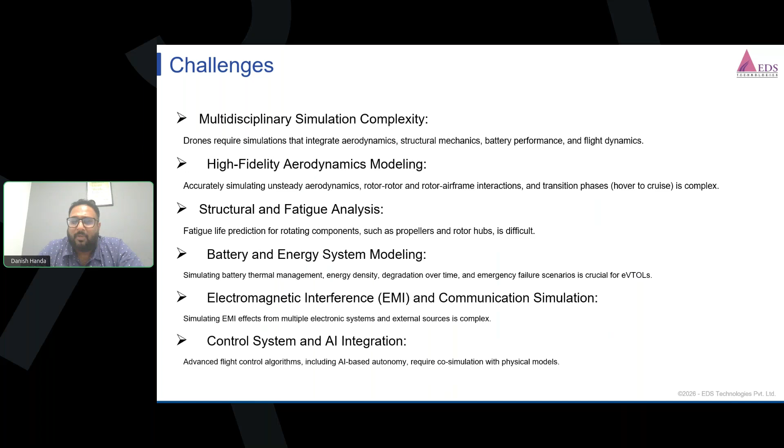Battery—nowadays we are working on battery systems, eVTOLs, etc. So definitely battery: understanding how different temperatures can have an effect on these batteries, how containment and storage effects are there. Then of course electromagnetic interference, because there are a lot of communication systems present inside the aircrafts, rocket systems, or eVTOLs, to understand the scenarios. And then control systems and AI integration, where we are working on advanced flight control algorithms, AI-based autonomy, etc.

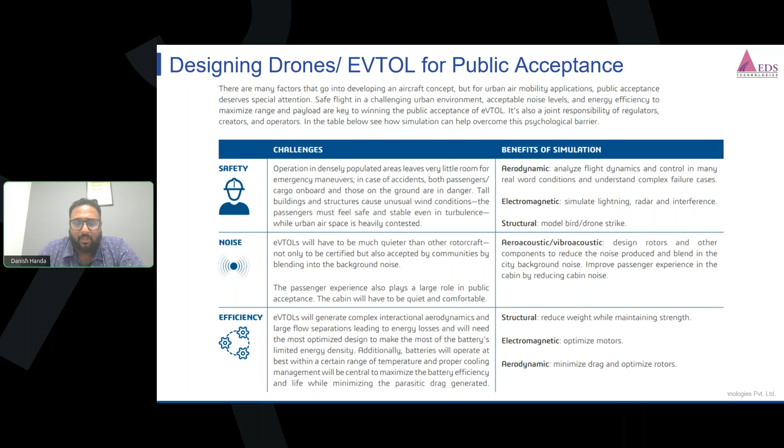So we have different solutions for that. For example, if I talk about aeroacoustics, or flow simulations, we have a product known as PowerFLOW. It's basically a solution that solves challenges with respect to eVTOL air taxis and flow simulations.

Then we have another solution known as CST Studio that works on both high and low intensity radio frequencies, to understand the entire electronic systems. Then of course many of us know about SIMULIA Abaqus, which works on structural simulations including explicit analysis, implicit analysis, as well as co-simulations.

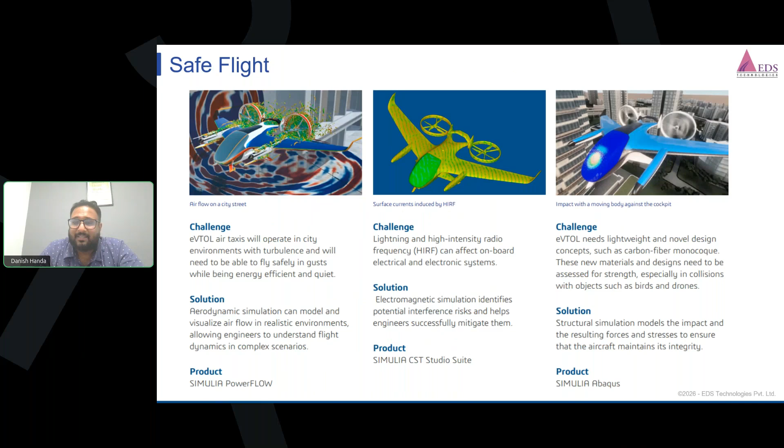We also have solutions for battery packs. We have a dedicated solution where you can model from cell level to package level of batteries, where you can understand what is happening, even the chemistry part of it. So we have a solution known as BIOVIA for that, and 1D simulations known as Dymola. All these simulations are integrated.

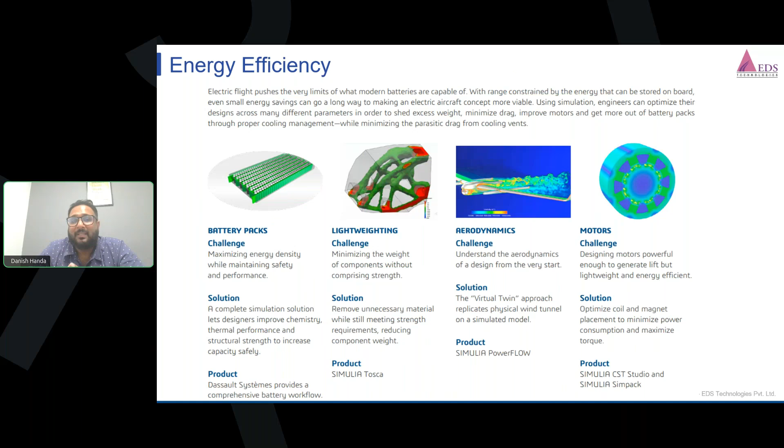And then of course we are more concerned about lightweighting in aerospace and defense with higher strength. So we have a tool known as Tosca, which can do topological optimizations, topographical optimizations, shape and size optimizations. And again, for aerodynamic challenges, as I told, we have PowerFLOW. And for motors, we also have solutions known as CST Studio, Simpack, as well as Manatee, where you can design, develop, and understand the electromagnetic effects of motors.

So moving towards the first challenge, that is our aerospace composite challenge, because now the industry has already revolutionized towards composites. We are overtaking conventional metal towards composites now. So it's very basic to understand how composites work, how we can design, simulate, and manufacture them.

So basically we have an end-to-end solution which can help you in designing, simulating, as well as manufacturing these composites, because composites are very unlike metals, right? They are totally anisotropic, non-homogeneous in nature, and they have layup effects. So you have to tell your manufacturer which layup I want to do, what kind of layup I want.

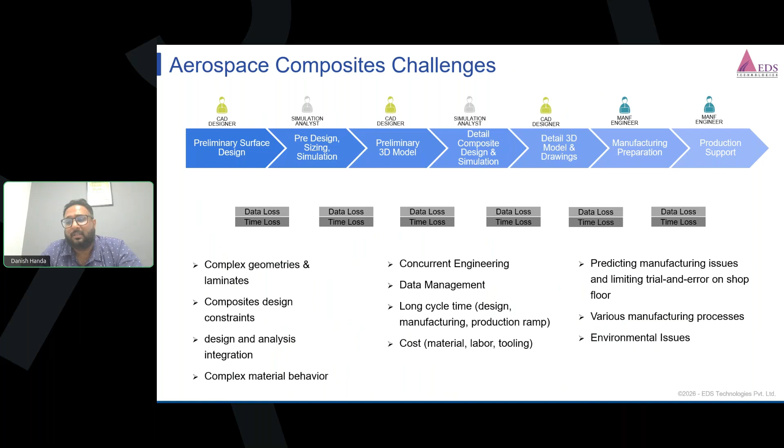So as a company, we offer a solution where you can have complete designing of your composites, whether it's a complex composite structure where you can use your own layups, create your layup sectioning, design the layups, and within seconds, this entire layup section can act as a preprocessor to your simulation tool. That is what we know as Abaqus.

And then you can also do some parametric studies, so that you are not manually changing any layups. You are directly giving the command to our parametric optimization tool that I want to use this thickness or these layup changes. So all these things can be directly transformed, and you can do n number of iterations within few minutes of time.

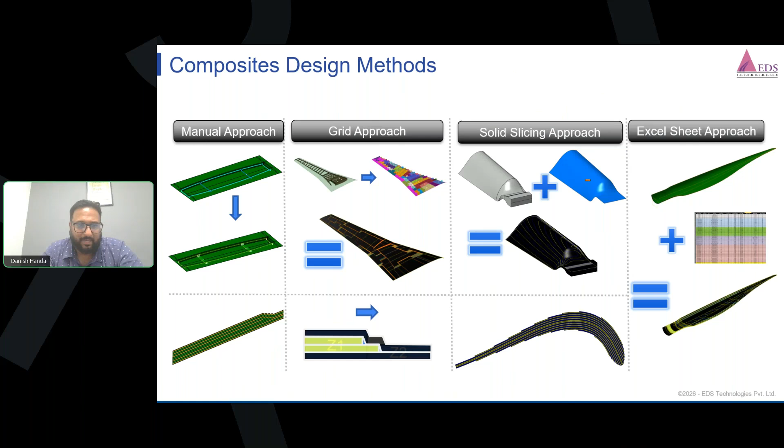So then moving towards simulation. Our simulation tool gives you the possibility for doing both 2D as well as 3D simulations. But another beauty is you can also do simulation of composites in both ways, that is shell as well as solid. In many software, they use surface modeling and then transform into it.

But here we can do both shell as well as solid modeling of composites, and you can get the ply by ply information also. So if I want to understand that I am having 10 plies in a particular composite, what is happening in the third ply, fourth ply, you can do all that.

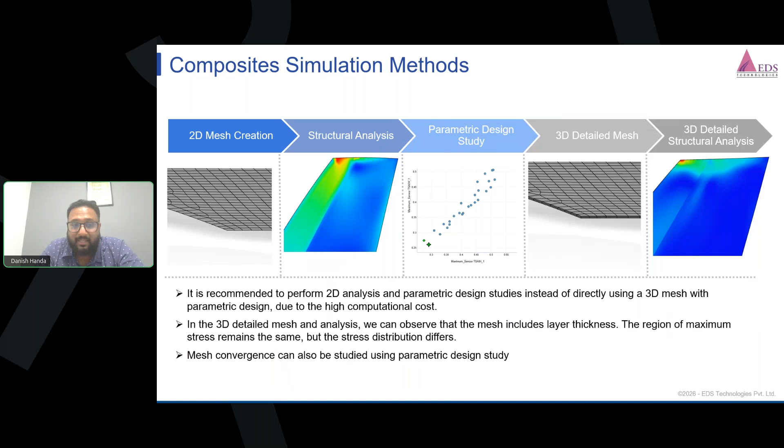Plus, we also have generalized theories. For example, von Mises stresses and all don't work for your composites. So here we have Tsai-Hill criteria, Tsai-Wu criteria, which give you the actual parameters to understand the failure of the composites. So here there are two different examples.

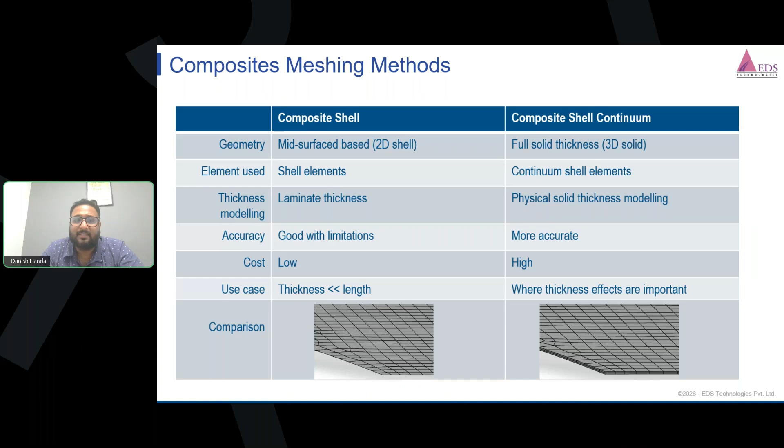For example, if it is a 2D shell or a 3D solid, this is the way how we can basically model our composites. Shell elements are there, continuum shell elements are there. Then we can give the solid thicknesses. So all these scenarios can be very well integrated with respect to our tool.

Different meshing methods are also there for composite structures. One is with respect to shell, another is with respect to continuum shell or solid. So all these things we can definitely do.

Then we can visualize the plies also. For example, you are giving an orientation because it has a very good impact on how the strength is basically for what loading condition you want, what kind of strength. So it helps you understand, and you can visualize your layups as well.

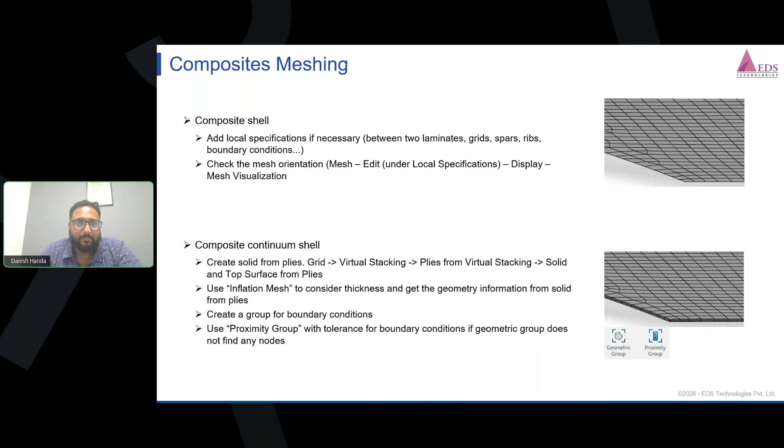And then after performing your simulations, you can definitely do the parametric study. As I told you, there might be chances your material may fail in the first chance, second chance, third chance. So what you do is normally you manually change the things and then you do the simulation, which takes a lot of time.

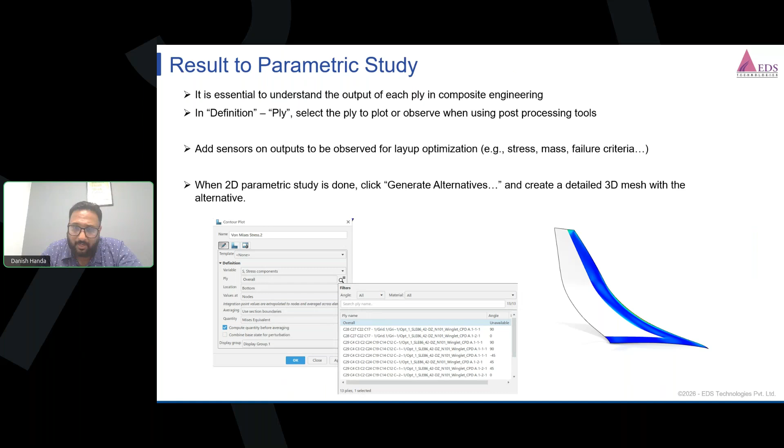So here we have a parametric tool where you can give the change in orientations manually, and it can perform the simulations in a nick of time. For example, I want 45 to change to 90, or 90 to change to minus 45, minus 45 to 30. So we'll give all the parameters to our parametric optimization tool, and based on that, it will give you the results for all these particular scenarios in a nick of time.

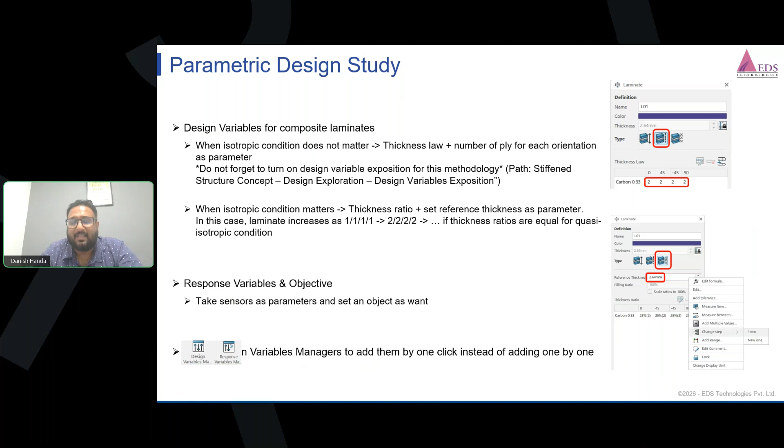And then you can do different iterations also based on the thicknesses, based on orientation effects. So all these things can be taken care of by the tool itself.

As I was telling you, it is not only designing and simulation of the composites, but also the manufacturing of composites. You need to make manufacturing drawings out of that. So basically simulation or designing we are doing to manufacture something, right? That is the reason we also have a tool for manufacturing preparation.

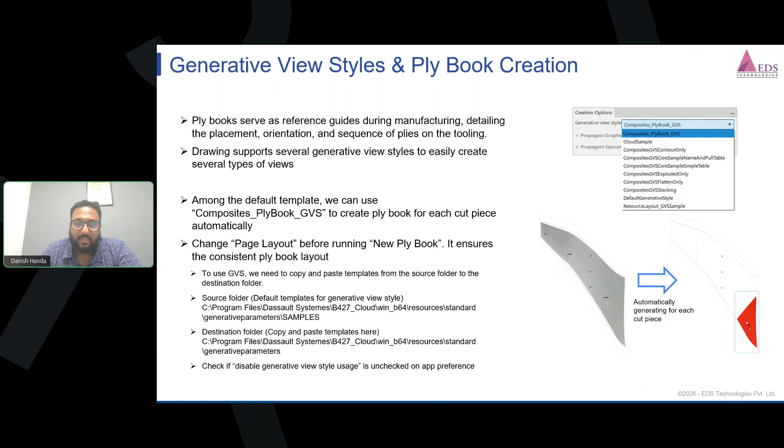So here what we can do is we can create layups as well as protruded views, or you can say exploded views for all these particular scenarios. And then you can generate your own designs based on the models you are having, and you can pass it on to your manufacturer. So manufacturing drawings, all 3D parameters, 2D parameters, the cut sections of each and every ply can be given to the manufacturer for that thing. So it's a very safe as well as good tool to use.

So this is the entire scenario for composite preparation. That is, you will start with the preliminary design, followed by composite simulation validation, and then a detailed composite ply design, and then the manufacturing part. So we covered each and every scenario in a single environment.

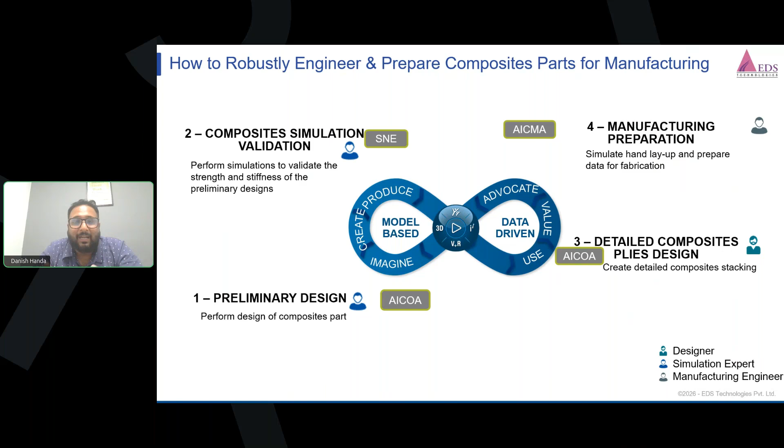As I was telling you, right now we are talking about different tools, but now we have a unified tool known as the 3D Experience platform. So you might be seeing 3D VR, all has been written. So now it's not only Abaqus or CATIA. Basically, we have a set of tools that can do seamless simulation in a single scenario. So I'll showcase you also a demonstration video of how it basically happens.

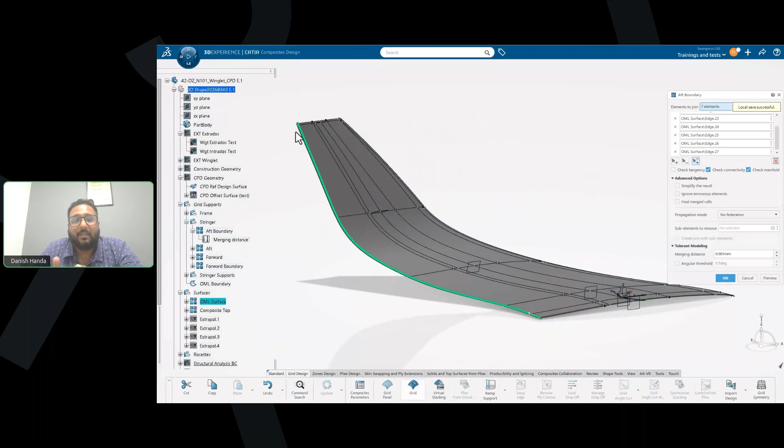So this is a particular scenario where you are using a 3D Experience platform. You can see the GUI also. Here, if you can see on the top left hand corner, it is 3D Experience CATIA. So this is CATIA, but the interface is changed. So here we are using a CATIA composite tool where you are doing all kinds of layup, sectioning, simulations, and everything in a particular platform.

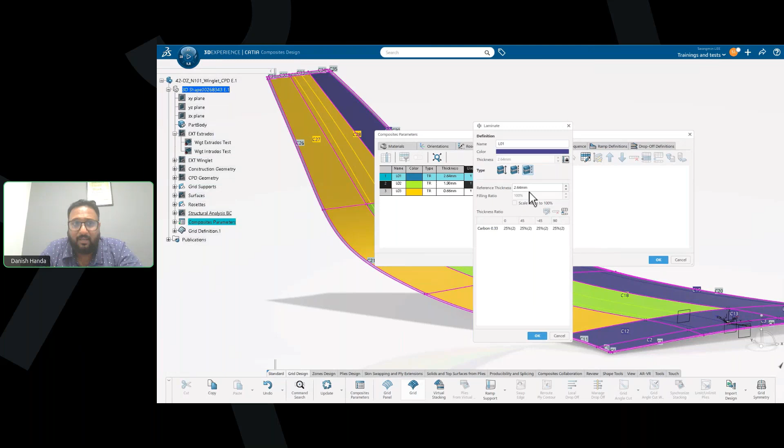You can see carbon fibers, cured thickness, uncured thickness, ply generations. Everything is done in this particular window. And once this pre-processing part of ply generation and everything is done, then within single clicks or a few clicks, you can directly go to the simulation tool. So you can see here, now the scenario has completely changed. Now you are in CATIA composites design, and in a click you have reached SIMULIA.

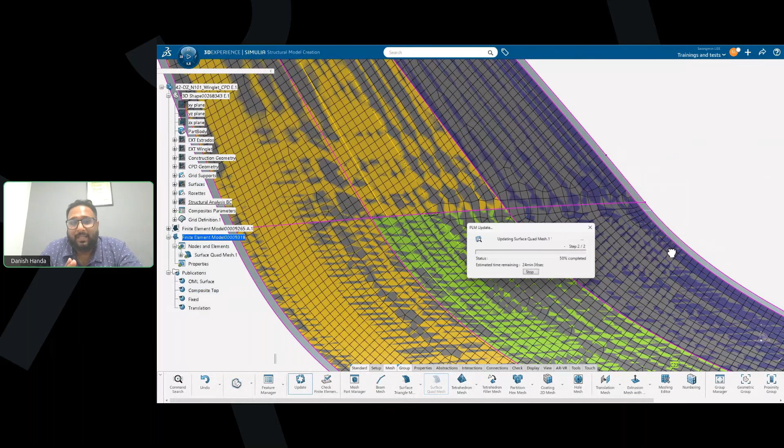SIMULIA is nothing but the backend which works on Abaqus only, but your data is saved, it is not lost. For example, when you are making a complex geometry, what happens when you upload the data in the form of a step file, CAD file, SLDT files? So when it goes to an FEA solver, what does it do? It may repair, it may have some gaps. You have to repair all these gaps.

Many a time it happens, but in our 3D experience platform, you are using the same GUI for CATIA and for Simulia. The only difference is within clicks you have to transform that geometry, so there is no data loss or anything that happens here.

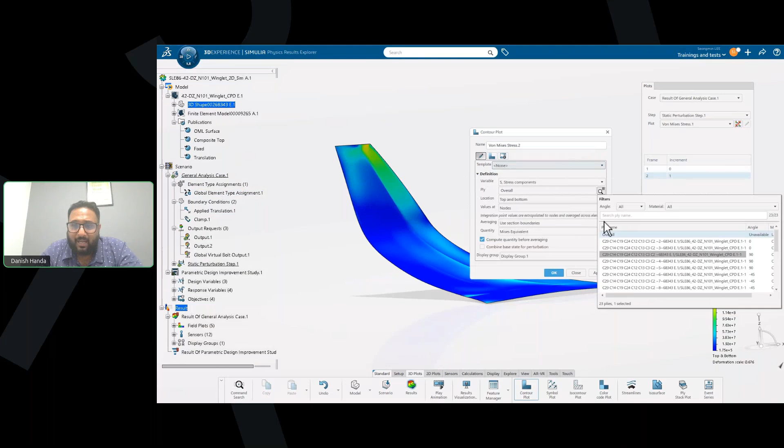Right now you can see the simulation has been completed, and the scenario is such that you can understand what is happening with it. You can see on the left hand side Simulia parametric design study.

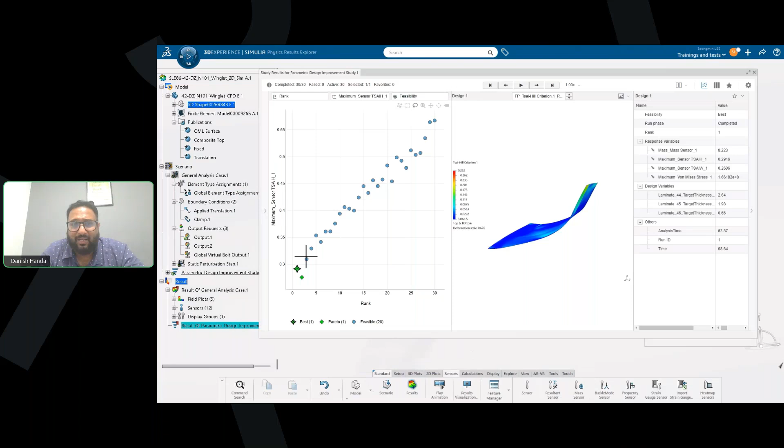After the simulation has been completed, we will be doing a parametric study using our own parameters—for example, this much stress, this much thickness, or this much ply orientation. I can do all these kinds of things, and within clicks I will get all the scenarios, for example maximum stresses or whatever inputs I have taken. I can simulate it all and understand what happens in each scenario. So this is how entire studies can be done.

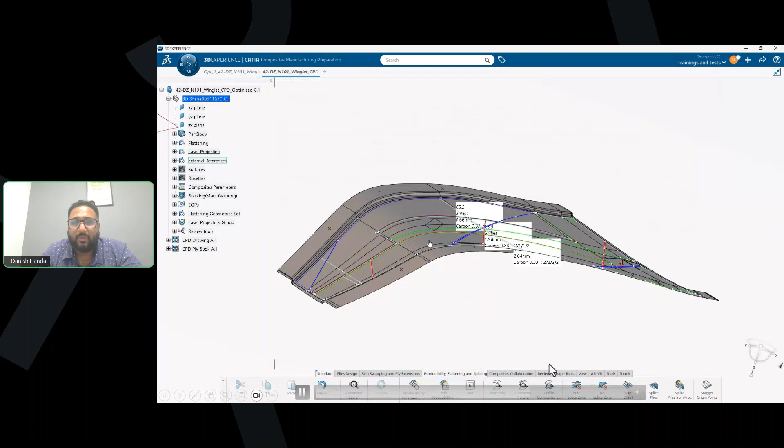Further, when we move towards the manufacturing part, you go to CATIA composite manufacturing preparation. Here you can create your own manufacturing drawings which can be transformed for your manufacturer. On the left hand side, the red color things are nothing but ply sections—cut ply sections basically. You will be able to transform each and everything into a manufacturing drawing and pass it on to your manufacturer. So this is an entire scenario of composites.

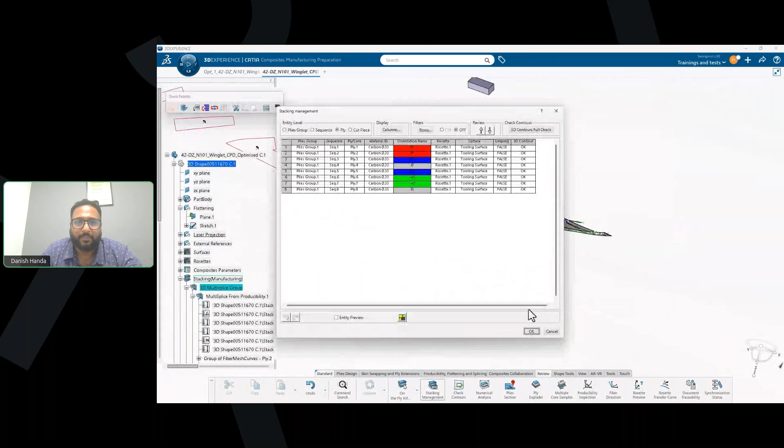Now we have done the structure. Definitely metals and other materials are also there in structures, and you can easily do that. A lot of explicit analysis, crack propagation analysis, you can do.

So you can create your own wind tunnels to understand what is happening with drones, and create your own fluid scenarios for different case studies.

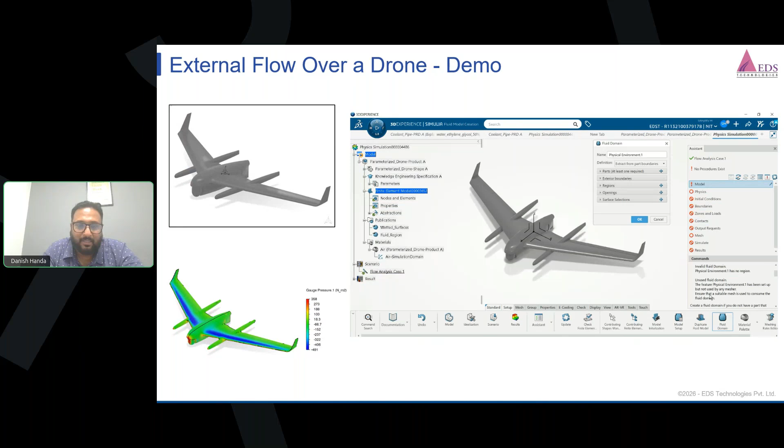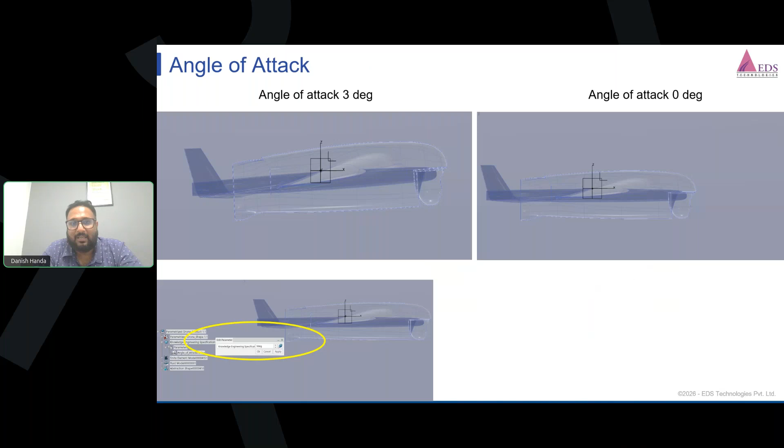One more thing—for example, if I want to understand what is happening with different angle of attack scenarios, we have taken one case study where one angle of attack is 0 and another is 3, and looked at how the fluid scenario creation happens, what the gauge pressure is in two different cases. So you are performing two different solutions, but you can compare all these solutions in a single window as well.

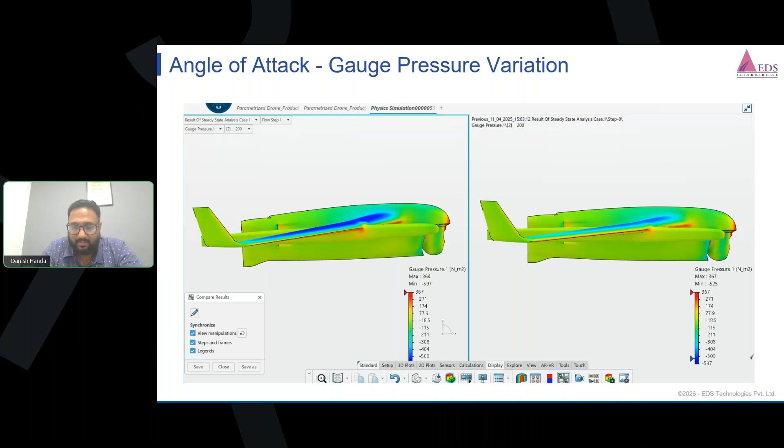So for example, for 0 degrees, what is the scenario? For 3 degrees angle of attack, what is the scenario? Similarly, you can have all your contour plots based on the inputs or outputs you want.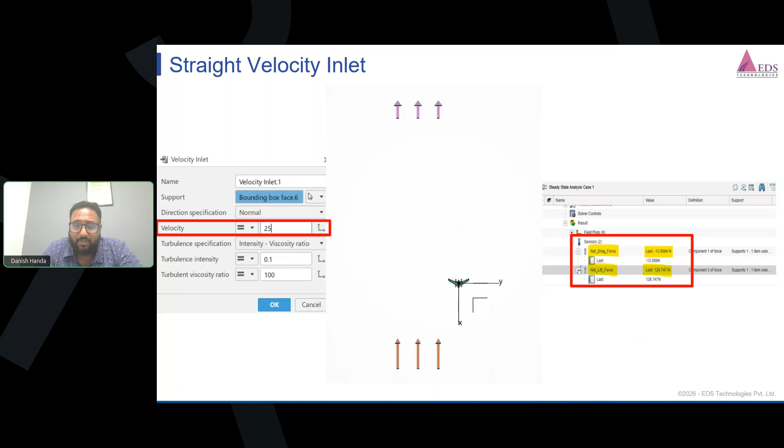There is also a linear velocity or straight velocity input at the inlet that you can give, and then study the fluid, but you can also provide the conditions of yaw and rolling movements. You can give the velocity direction in X, Y, Z directions so that you can understand how the yawing and rolling conditions can be simulated.

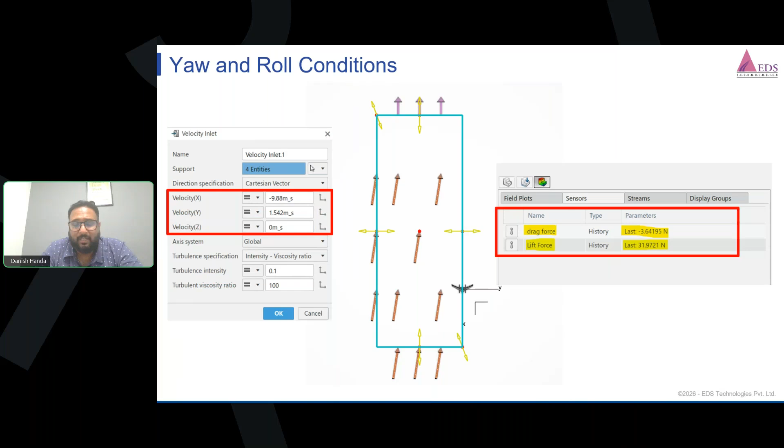You can also get outputs in terms of drag force and lift force. So for example, if I want to understand the CD, CL, CM of a particular thing, or the lift to drag ratio of a particular environment, I can do that.

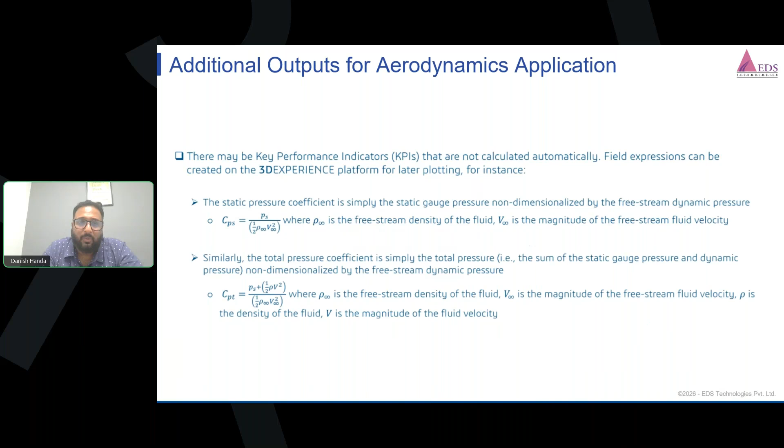Some of the outputs may not be available in the solution directly. So what you can do is use your own formulas—we have a tool where you can put your own formulas, and based on these formulas you can get the contour plots. For example, if I want a particular field expression like CL, I will put a CL formula, that is the coefficient of lift formula, and based on that I can get the output in terms of coefficient of lift.

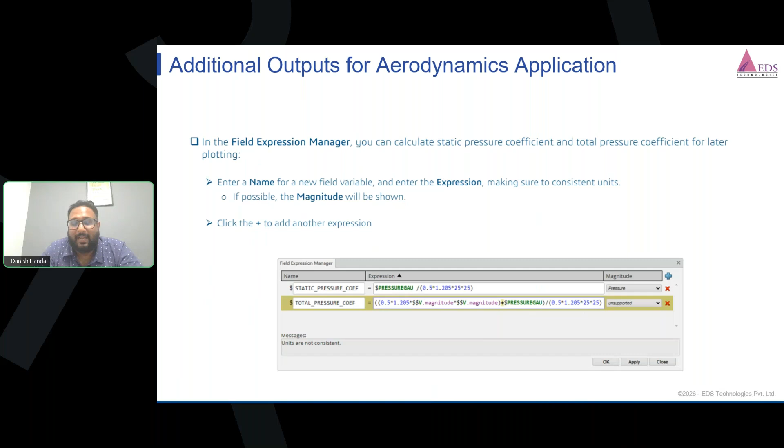So these scenarios are also covered in the simulations. Another important part is where you have radar systems, antennas, and PCB designing—these are all very complicated things we need to understand, and our platform can also do that. So what happens here is, firstly, we have started with designing something, and secondly, we have done simulation in a structural manner.

Third, we have done simulation in a CFD manner. Now, the fourth part is we are covering the electromagnetic parts, radar parts of this particular scenario.

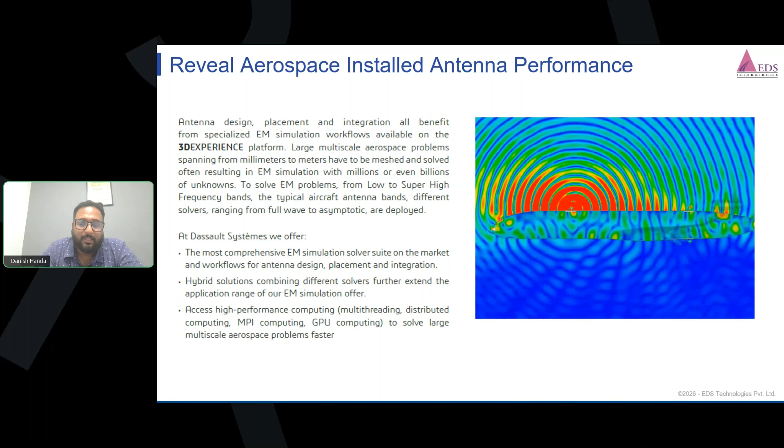So first case study is how we are simulating the particular scenario. For example, you have designed the antenna, prepared the 3D model of the entire aircraft, where you are placing the antennas, how the RF component works, how the design verification is taking place. So the entire thing you can do in a single software.

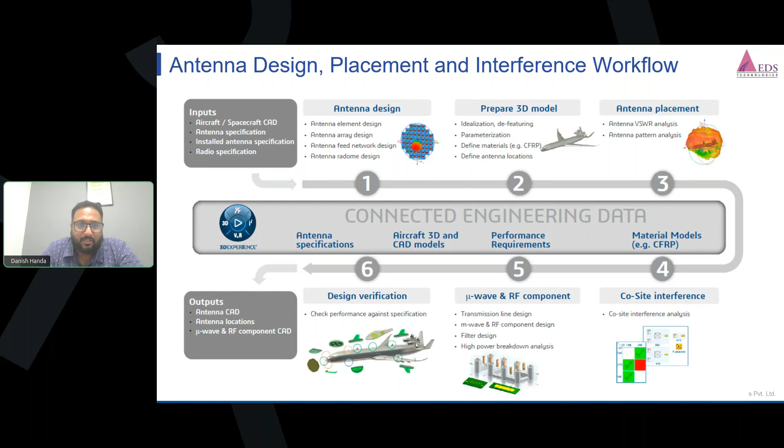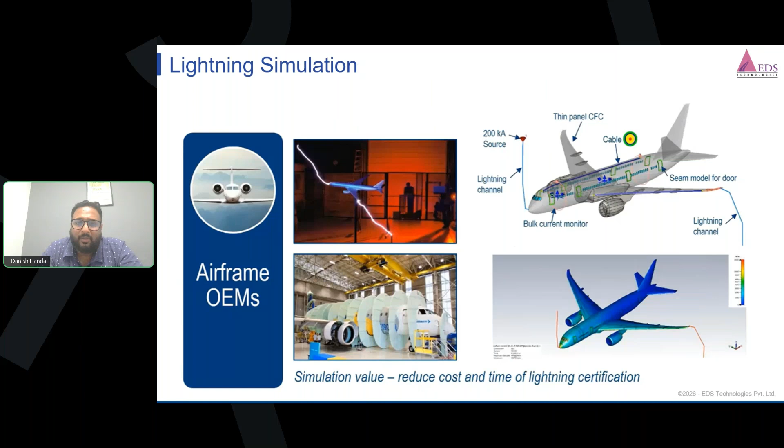One of the case studies is lightning simulation. You can see experimental things are also going on, and parallelly, the simulation work is also going on. So you can do the lightning simulation in our simulation tool, where you can have your own cables, your own sources, lightning channel, and all these things, and get the output in terms of currents versus time, etc.

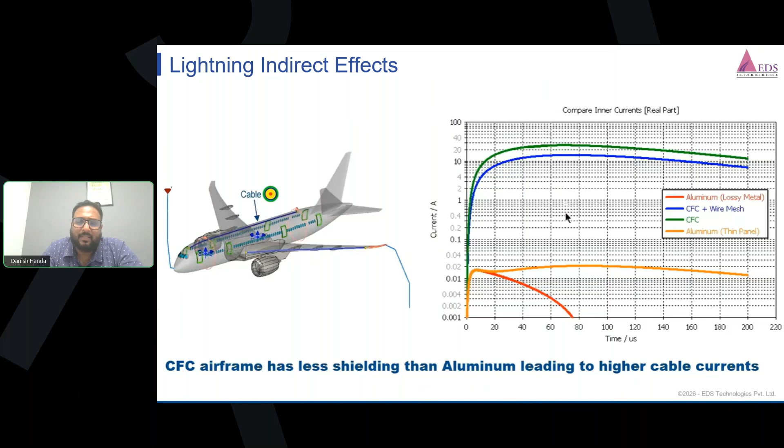Similarly, these case studies are for different materials - you can see aluminium, carbon fiber composites, again aluminium. So different scenarios have been developed here.

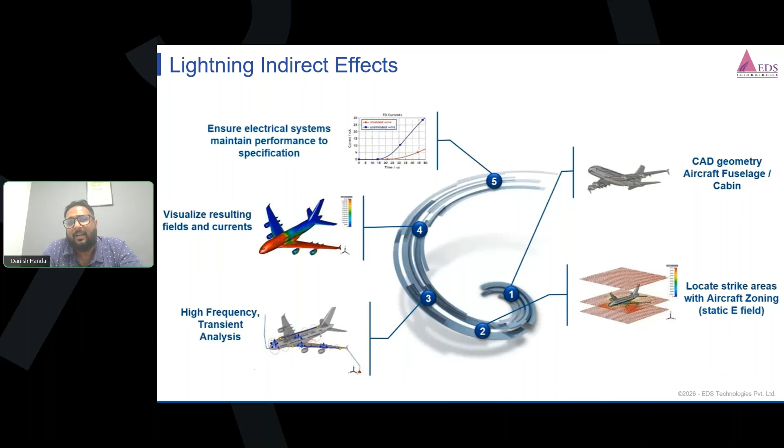Another aspect is lightning indirect effects, where you can have your locate strike areas, decide high frequency transient analysis, then visualize the results. So it works on both high frequency analysis as well as low frequency analysis.

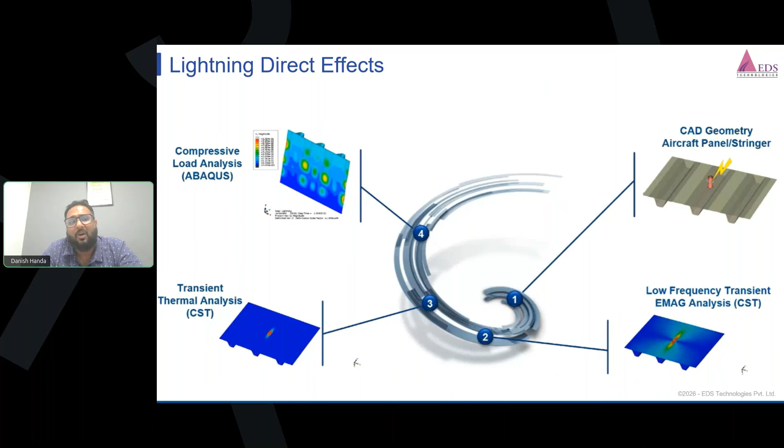And these are the direct effects in terms of EMAG application, where you have low frequency transient EMAG application with respect to aircraft panels, and you can also do transient thermal analysis. These results can directly go into a structural simulation for understanding better in terms of compressive load analysis or any kind of bending load analysis if you want to do.

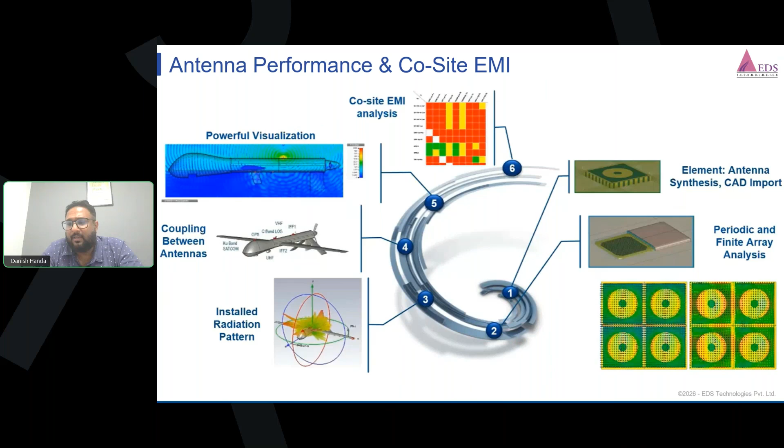Third thing is again antenna performance - how our antenna should be, what kind of rays are there, what kind of radiations can be done, how the coupling between antennas can happen. All this kind of visual understanding can definitely be done using this particular solution.

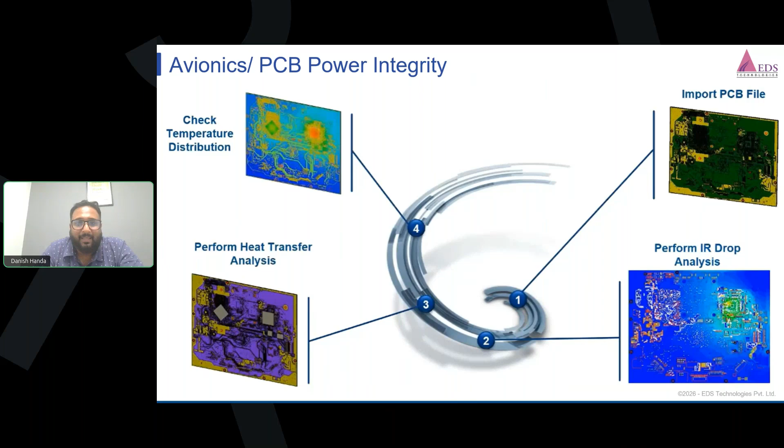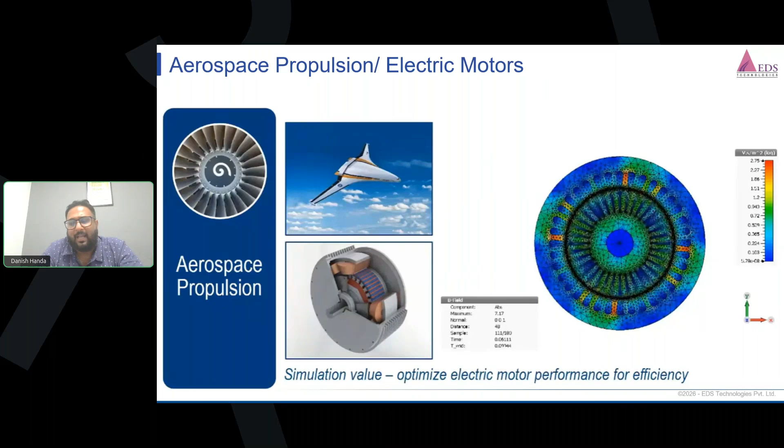So here what we are proposing is that it's a single GUI, a role-based system. Whichever role or situation you want - for example, a structural engineer wants a structural scenario, we can provide that. Then a CFD person wants a CFD scenario, we can provide that as well, plus the EMAG applications, the radar applications, etc. We also have one major tool where we work on multi-body dynamic simulations, both rigid as well as flexible.

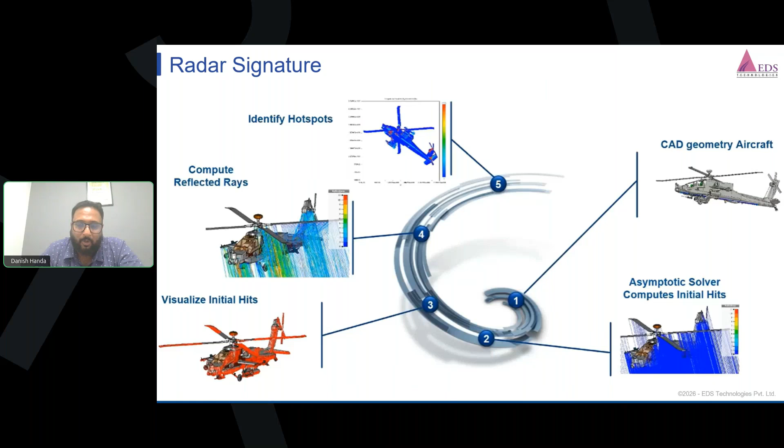Mr. Anand will be demonstrating how the multi-body dynamic simulations can help you out, and then followed by that we will be taking your questions. So over to you, Anand.

Thank you, Danish. I hope I'm audible. Yes, Anand, you're audible.

So this is the agenda for this Simpack session. We will discuss what is Simpack and its applications, then the benefits of SIMULIA MBS or Simpack solutions, and then some advanced vehicle dynamics MBS processes like handling, ride, drivability, durability, NVH, and real time.

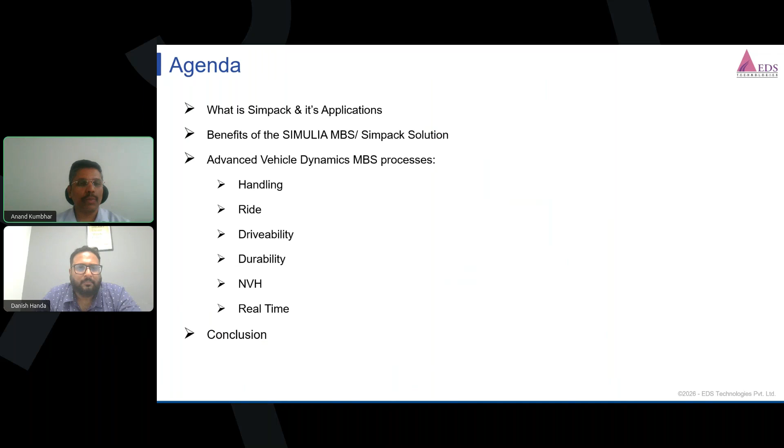So what is Simpack? Simpack is a multi-body simulation software used to analyze the dynamic behavior of mechanical systems that contain multiple moving bodies connected by joints, springs, dampers, and force elements. Simpack is used to predict and optimize motion and loading of any mechanical or mechatronic system, even up into the acoustic range.

Its applications - first is automotive, where we can go for handling scenario, ride and comfort scenario. Then next is engine application, a complex system that has almost 100 moving parts, and it includes flexible bodies also. So a lot of details are there.

Then the next application is railway vehicle. Simpack is very strong in railway vehicles, and it is the first application of Simpack. Here we can go for derailment analysis, comfort analysis, and we can calculate the critical speed of the railway vehicle. Then next is wind turbine, like offshore wind turbine, where we can generate the aerodynamic and hydrodynamic forces in Simpack and analyze it.

Next is a roller coaster, which is just a railway vehicle, meaning any type of railway vehicle, and we will check for the wheel to rail contact.

Then next is earthmoving machinery. It is important to bring in the overall hydraulics, so we can also bring the hydraulics into this.

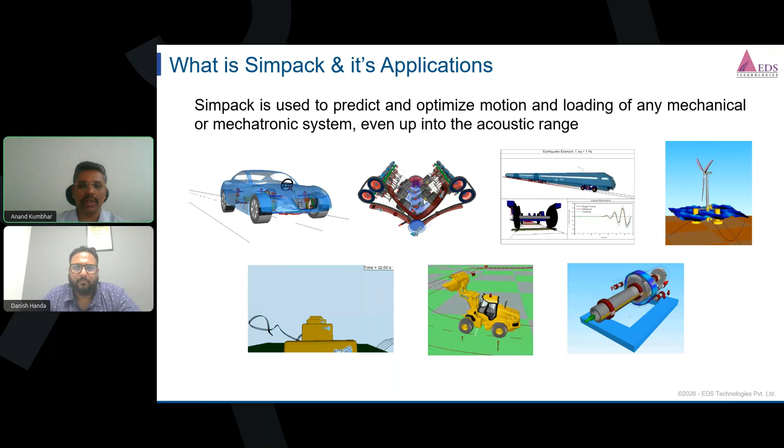Now we will discuss the benefits of SIMULIA Simpack: versatility and efficiency, solver speed, solver robustness, result accuracy, real-time capability, and process automation.

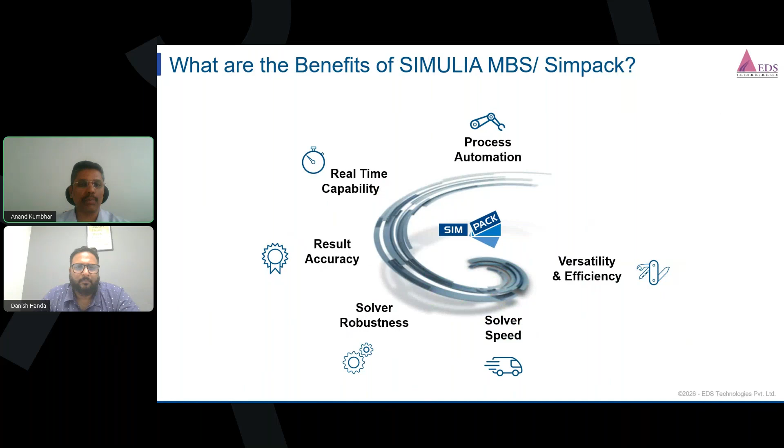The first benefit is versatility and efficiency. It's mainly easy and efficient model setup, simulation process standardization, and advanced MBS result assessments.

How is it achieved? We have Simpack Pre for the pre-processing, and for process standardization we have Simpack Wizard with standard templates, and we have Simpack Post.

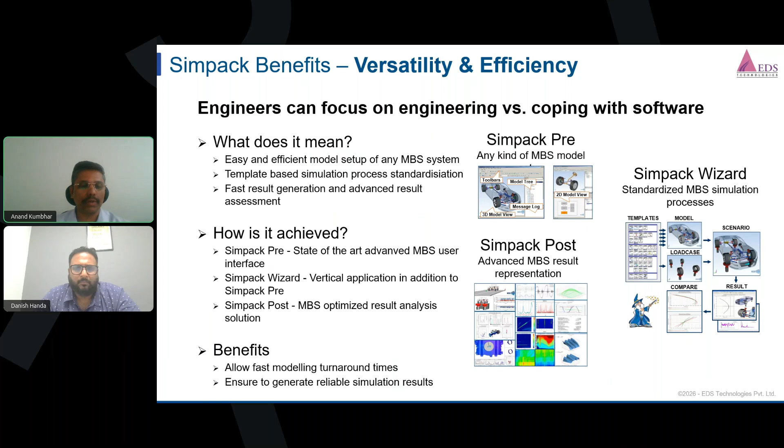Why is it important? Because it provides fast modeling turnaround times and reliable simulation results, and due to process standardization, it allows fast result and KPI assessment.

Next is solver robustness. What does it mean? It's mainly about challenging simulation scenarios which are running reliably.

For example, in this animation, it's a complete vehicle model running over a huge single bump, with lift off and touchdown effects, which is quite challenging numerically. This runs very robustly in Simpack, meaning there is no time consuming solver tuning necessary.

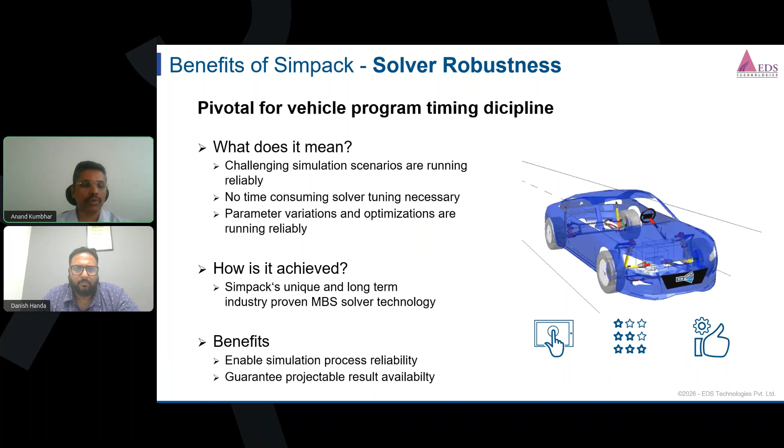This is important because it guarantees simulation process reliability and projectable results availability, which is essential for the according simulation processes.

Next is result accuracy. Simpack does not only deliver accurate results in low frequency areas, for instance handling dynamics applications, but also accurate results up to the acoustics of a gearbox, like gearbox noise or other acoustic effects.

This also means it is possible to set up models with an unreached level of model detail. For instance, here we can see complete car models, a complete truck model, and also a complete engine model containing many detailed components.

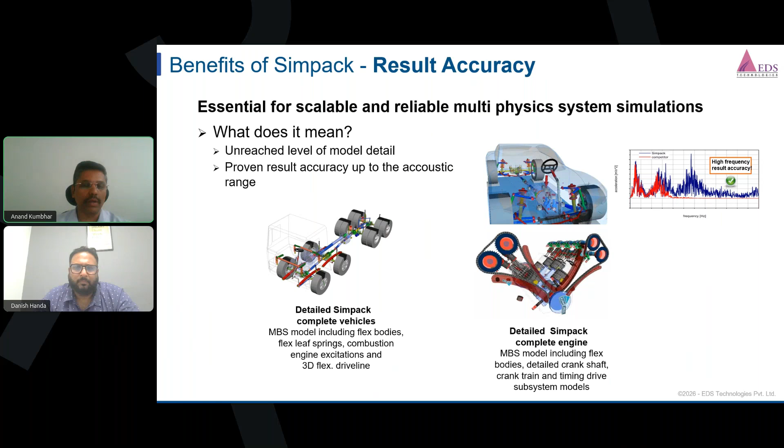Due to Simpack's solver capability, it's possible to get very precise and accurate results for those kinds of models. How is it achieved? There is an important technology called the Simpack flex body integration technology.

There are three types of flexible bodies we can import here. First, Simpack MBS integrated reduced linear flexible bodies, which is only a linear deformation. If you want that, you can go for this.

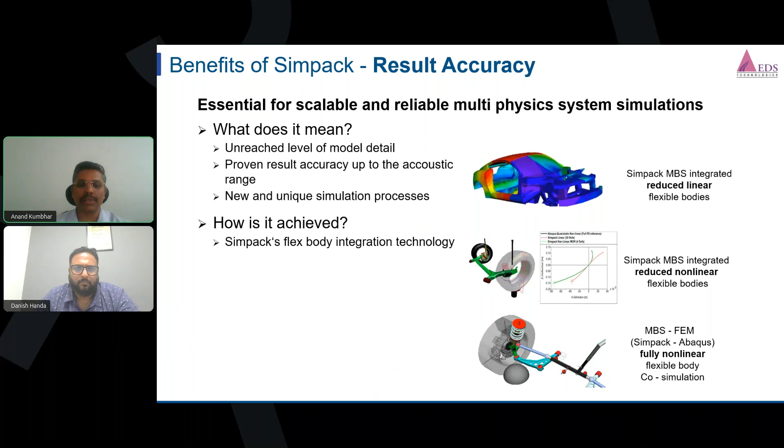If you want a non-linear deformation, you can go for the Simpack MBS integrated reduced non-linear flexible bodies. There is also co-simulation between MBS and FEM, like Simpack and Abaqus, meaning you can also include plasticity in this co-simulation.

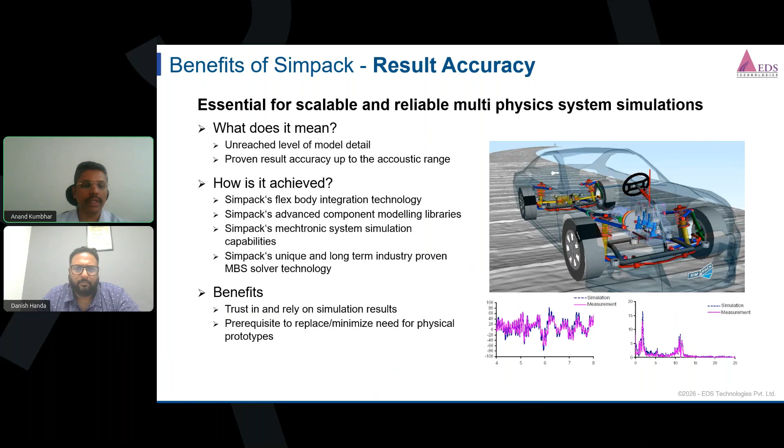Why is it important? Because it's in order to ensure trust in and rely on the simulation, which is a prerequisite to minimize the need for physical prototypes with accurate simulation results.

The next benefit is real-time capability. This means we can have an unreached level of model detail enabling new simulation processes, and due to having those detailed models also running in real time, we can now enable processes like real-time ride simulators.

As you can see in this animation, a real-time ride simulator is shown. One person is sitting inside the test rig, giving input to the model built in Simpack, which you can see here.

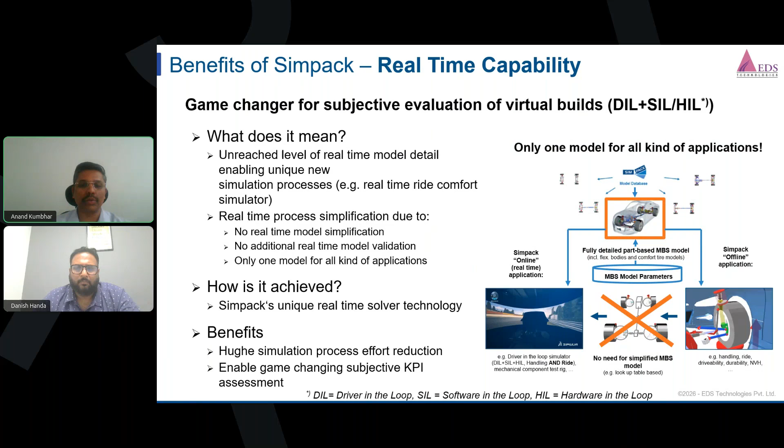With actual physical devices like steering, acceleration, or brake pedal, he is giving input to this car which is built into Simpack. That's what is called real time.

What does this mean in terms of process simplification? Being able to use the same model for offline and real-time application means there is no need for real-time model simplification; we can use the same model for real-time applications.

And last but not least, there is process automatization capability. This means Simpack provides coding tools and processes to do automatic execution of standard simulation processes and automatic assessment of the standard products KPI.

How is this achieved? We have Simpack wizard capability to facilitate the standardized processes. We have standard templates here we can see, and we can select these templates and build the model. Also we have standard load case templates, so we can select the load case. We have built the model and we can create the scenario. Then we can go for the results, run it and go for the post processing.

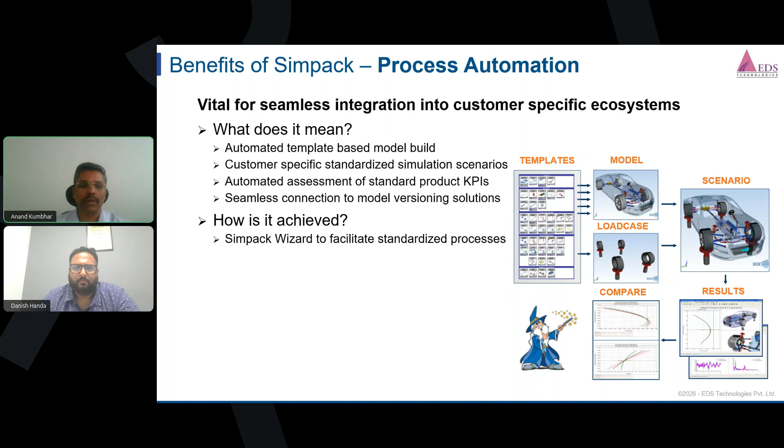It is based on the intelligent assembly of the model hierarchy levels. You can see here on the right side, the whole process is based on template based parameterized models, which can be grouped in models and sub models, and are assembled automatically.

Last but not least, Simpack provides a scripting capability for all kinds of Simpack functionalities. This starts with the model creation, goes through solving the models and doing parameter variations, up to the result of post processing.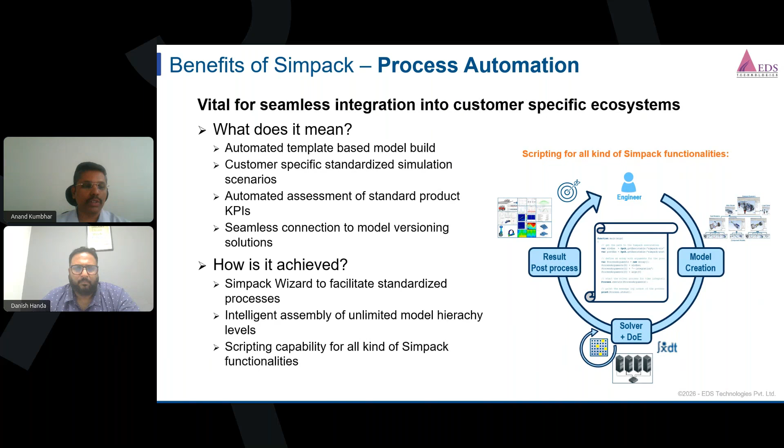Next, we will discuss the vehicle dynamics relevant components and systems. There are many relevant components and systems to be considered. This starts, for instance, with the combustion engine, and the gearbox block unit, which includes the clutch, flywheel, converter component. It includes the flexible gear drive and flexible drive lines, and of course flexible elastokinematic suspension. Then the steering system, and last but not least the flexible car body or subframes.

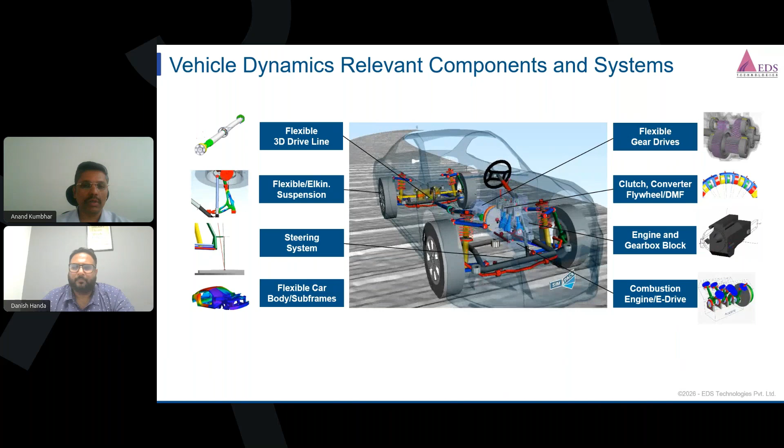Next, we will discuss the workflows in the vehicle dynamics application areas. First we will start with the handling. Handling means the assessment.

Handling means the assessment of the lateral vehicle dynamics and according KPIs. Typically a vehicle should be easy to drive and easy to control at a lateral dynamic stability limit, and it should also be fun to drive. For instance, dynamic steering response and steering feeling should be convenient.

In order to achieve this, it's a complete vehicle simulation in terms of open loop maneuvers like constant velocity cornering analysis scenario or fish hook, as well as closed loop maneuvers including according driver models to do simulation scenarios like a double lane change, constant radius cornering, or other simulations. Here we can see this automotive vehicle, a passenger car. It is applicable to passenger cars, trucks, buses, or any defense vehicles also. So we can go for that.

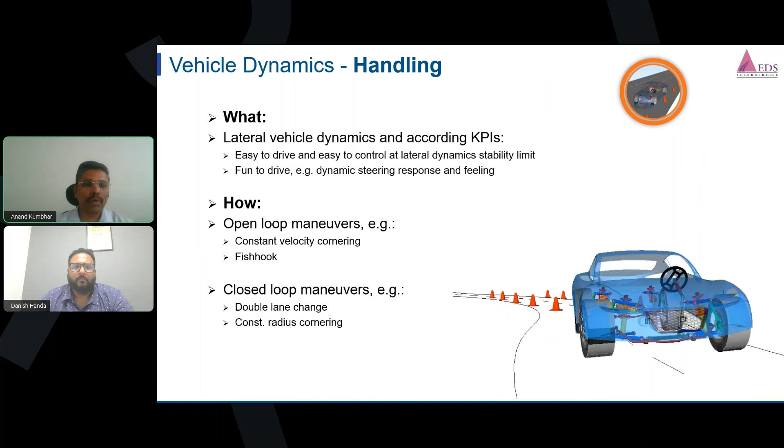Next workflow is the ride. What does it mean? It is related to the vehicle dynamics and according KPIs. The target is convenient vertical vehicle oscillation behavior and the related occupant driving comfort perception.

In order to achieve this, using virtual simulation scenarios, for instance, hydropulse test rig simulations are used, including deterministic, synthetic, stochastic, and measured road profile excitations, as well as the transfer path analysis. And another option is to drive the vehicle on the virtual road, as you can see here.

There are several options to do this, for instance, single obstacles using synthetic and stochastic road surfaces, and also based on the measured road surfaces. We can also import here the measured road surface data.

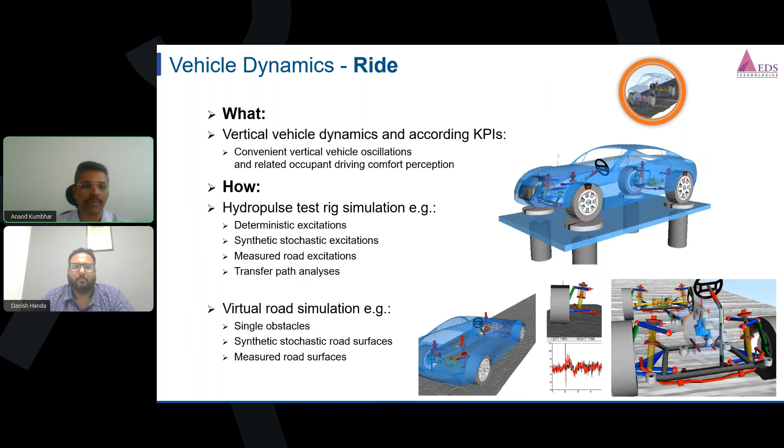Next workflow is the drivability. Drivability means the longitudinal dynamics and according KPIs. The target typically should be a dynamic but at the same time convenient longitudinal acceleration and deceleration. So how can this be assessed and optimized using simulation?

This is basically used in longitudinal dynamic complete vehicle maneuvers. For instance, we can do the gas pedal tip-in, tip-out simulation, then idiot start, also called rapid start. Idiot start is basically revving up the engine and dropping the clutch. This is an extremely hard simulation scenario when you do that on your car, you are going to excite everything that can vibrate, so you need a very robust solver to solve that. Then we investigate the gear shift behavior or braking behavior of the vehicle.

Next workflow is the durability.

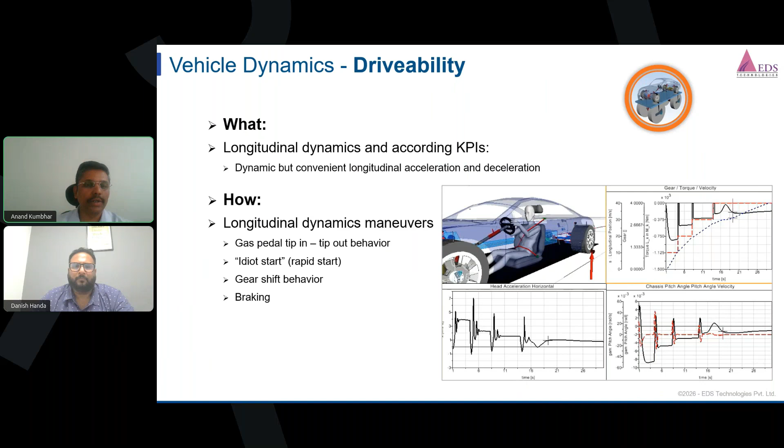Durability is related to mechanical component reliability and according KPIs. For instance, these are dynamic loads and stresses, fatigue and durability results derived from the dynamic loads.

How to determine this in virtual simulation? Typically there are hydropulse simulations, rough road simulations, or driveline loads and oscillations, which are input for the dynamic loads. Also abuse or extreme events can be used to determine according loads, for instance maneuvers like pothole braking or even obstacle collisions between the suspension components and the obstacle.

These might be the simulation scenarios. Stress results mean stress result post-processing is possible inside Simpack, meaning we need flexible bodies for that, and you can see contour plots like this. You will get the stress results, and we need to transfer these results into fe-safe code, where we can go for the durability, like we can calculate the fatigue life.

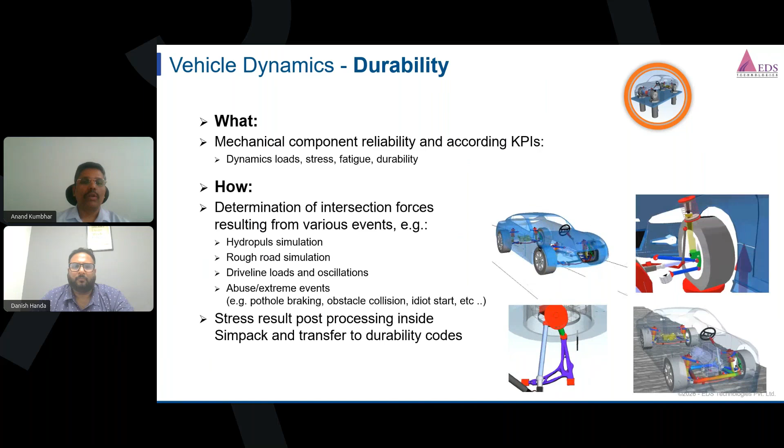Next workflow is the NVH. NVH means the mechanical structural noise and vibrations of the vehicle, and they have according KPIs, for instance resonance frequencies and amplitudes of forces and accelerations, and we can also determine surface velocities or assess the acoustic pressure.

How can this be done in Simpack? It is basically doing nonlinear powertrain and driveline effect analysis up to the acoustic range, for instance by doing a complete vehicle driveline run-up simulation. Also we have simulation scenarios like gearbox whine and gearbox rattle analysis.

Gearbox whine means a high pitched, smooth, continuous noise, and gearbox rattle is a more irregular, metallic or clattering noise.

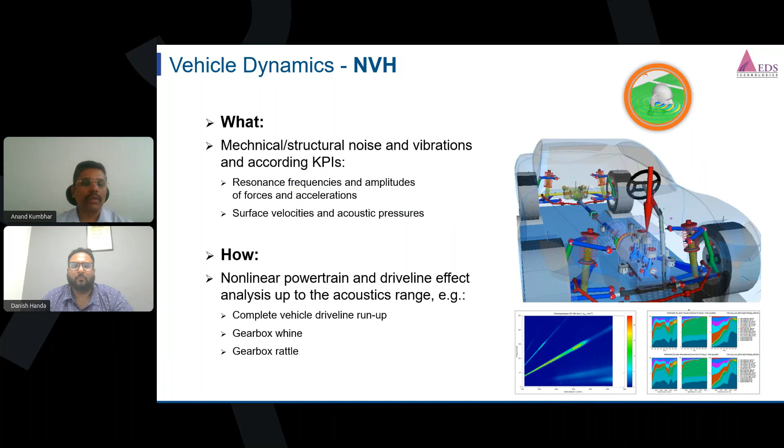Next workflow is the mechatronic experience. This is last but not least, related to vehicle dynamics workflow, and it contains software in the loop, hardware in the loop, and man in the loop simulation scenarios. This is also called real-time capability. This mechatronic experience relates to a convenient overall mechatronic system experience.

Especially it's important to enable simulation-based development of advanced driver assistance systems, for instance for autonomous driving. How can this be enabled? There are several technologies like hardware in the loop, software in the loop, or man in the loop simulation.

For man in the loop simulation, here we can see the test rig. The person sitting inside the test rig gives input to the car which is built in Simpack, by physical devices. So this is achieved by HIL, SIL, or MIL—man in the loop simulation.

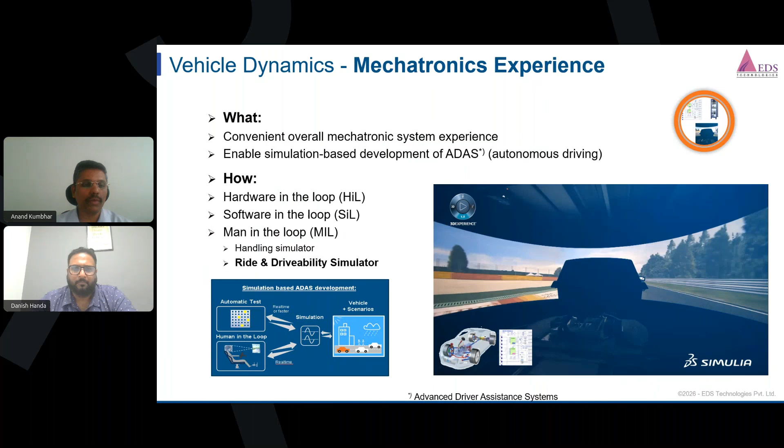In the next slide, to summarize the vehicle dynamics workflow: this slide shows there are several workflows related to vehicle dynamics, and it's important to note that almost all of them are also able to be performed in real time.

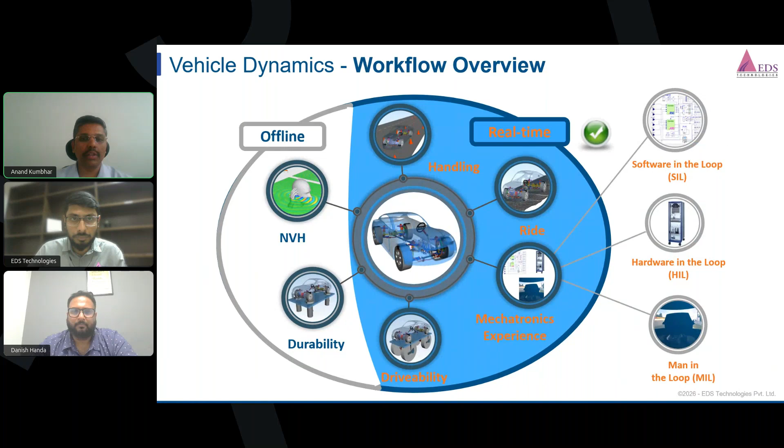Due to this Simpack solver capability, we can see handling, ride, and mechatronic experience drivability can be done in real time, while these two can be done offline. Only one MBS model is required for all vehicle dynamics applications, for all vehicles.

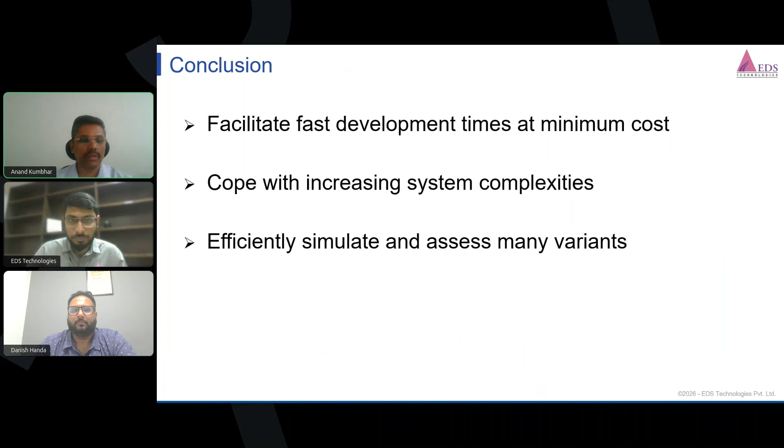Now, the conclusion. Regarding complexity, Simpack helps to cope with increasing systems complexity because it innovates and provides unique MBS simulation technologies. In terms of diversity, Simpack allows efficient simulation and assessment of many variants because it contains a sophisticated solution for MBS process standardization and automation. Simpack also facilitates fast development times at minimum cost because it is the best available fast, robust, and accurate MBS solver. That's it from my side.